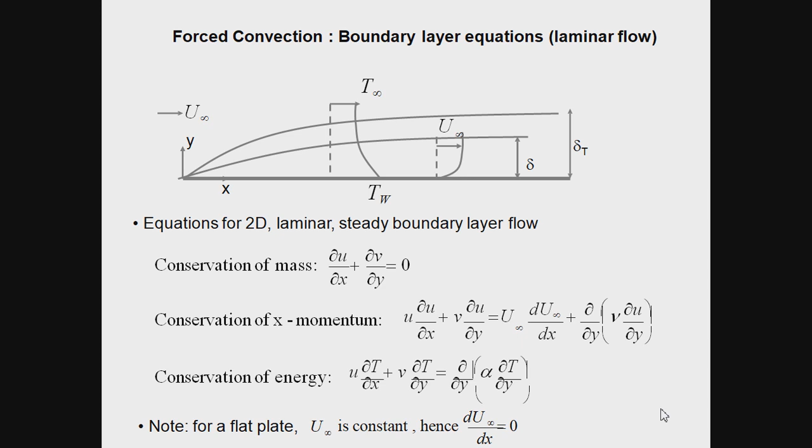First, we will consider forced convection in laminar flow, with steady flow. In the boundary layer zone, we can apply fundamental laws of physics: conservation of mass, conservation of momentum, and conservation of energy. All the equations are given in the slide, where u and v are the velocities in x and y direction respectively, and alpha is the thermal diffusivity. As we know, for a flat plate the free stream velocity of the fluid is constant, so its first derivative with respect to x, the direction of flow, will be 0.

Now in forced convection over a flat plate, as discussed in the last slide, we want to evaluate the values of coefficient of friction and convective heat transfer coefficient by solving the equations of conservation of mass, momentum, and energy. These equations can be solved approximately or numerically, and an exact solution can also be obtained.

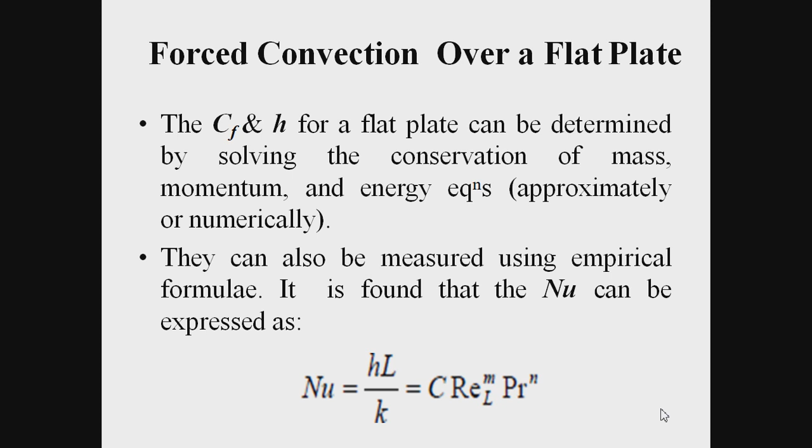By solving these equations, we can get an empirical formula. This formula can be expressed as the Nusselt number, that is HL upon K, as a function of Reynolds number and Prandtl number, where C, M, and N are coefficients depending upon the geometry of the boundary.

Now in this slide I am showing the exact solution of that equation given by Blasius. As per that solution, boundary layer thickness delta upon x equals 4.99 upon root of Reynolds number, the local Reynolds number, where x is the distance of the place we want to evaluate the boundary layer thickness, and delta is the boundary layer thickness.

Similarly, the skin friction coefficient can be obtained by this formula, defined as the ratio of wall shear stress and half rho u infinity squared. It may be given as 0.664 divided by root of local Reynolds number.

Likewise, we can get the average drag coefficient, defined as the average of this skin friction coefficient over the length of the plate. Similarly, the local Nusselt number is based on the position at which we want the value, and if we average these values, we get the average Nusselt number. All these values are for forced convection over a flat plate in laminar flow.

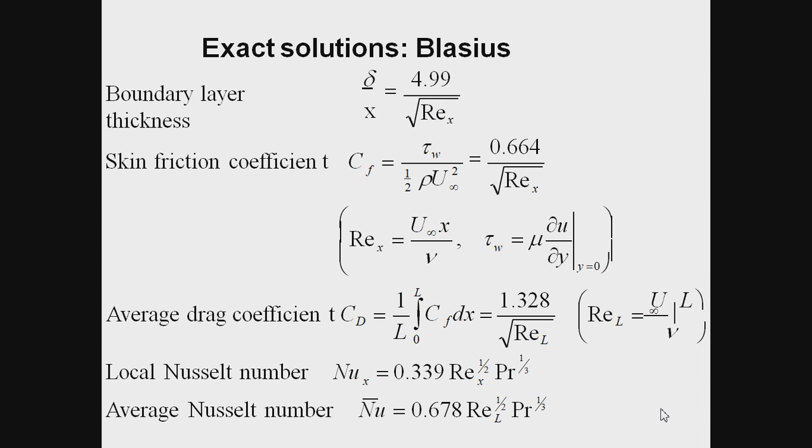Similarly, in this case we can evaluate the local heat transfer coefficient using this formula and the average heat transfer coefficient using another formula. All these formulas don't need to be memorized; we can use them directly from the heat transfer data book.

The properties required for calculating all these values include thermal conductivity. For Prandtl number you require dynamic viscosity and specific heat of the fluid. All these properties can be obtained from the heat transfer data book. This is very, very important.

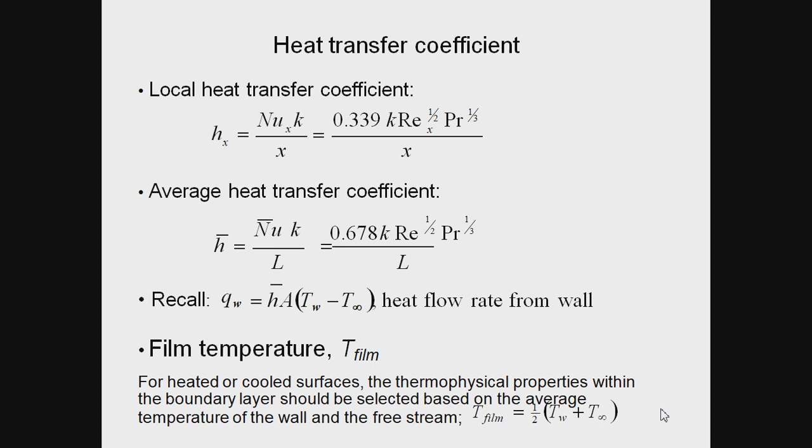The values of the properties will be evaluated at film temperature. Film temperature is the average of surface temperature and the temperature of the free stream fluid. This is very important, that all properties are evaluated at film temperature, and we can get these values using the heat transfer data book. There is no need to memorize these formulas.

Now, based on the previous solutions, we can have curves. As we can see, the hydrodynamic boundary layer keeps increasing as we move in the downstream direction. Similarly, the thermal boundary layer also increases, but the convection coefficient H keeps decreasing in the downstream direction. Initially, this decrement is very fast.

Similarly, a similar analysis can be done for the turbulent boundary layer, as shown in the figure. The laminar region is in the upstream direction, and thereafter, in the downstream direction, we get the turbulent boundary region.

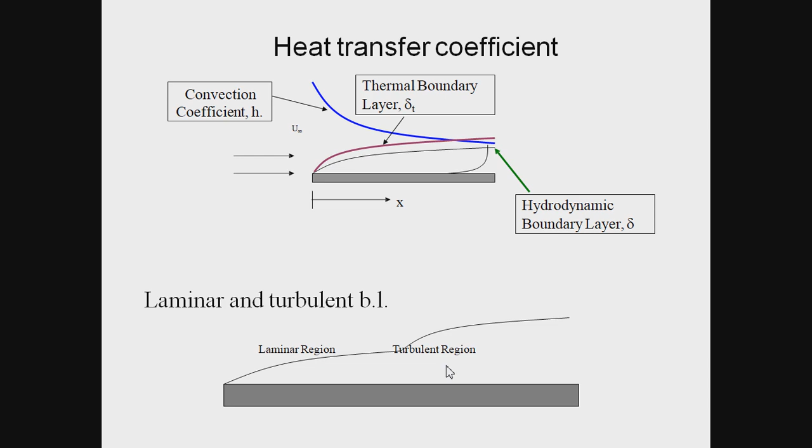Now we will discuss forced convection over a flat plate when turbulent flow is present. In that case, Reynolds number can be obtained using this formula. Then, using these formulas for coefficient of friction, coefficient of drag, local Nusselt number, and average Nusselt number, we have to apply these formulas. All the formulas are given in the heat transfer data book.

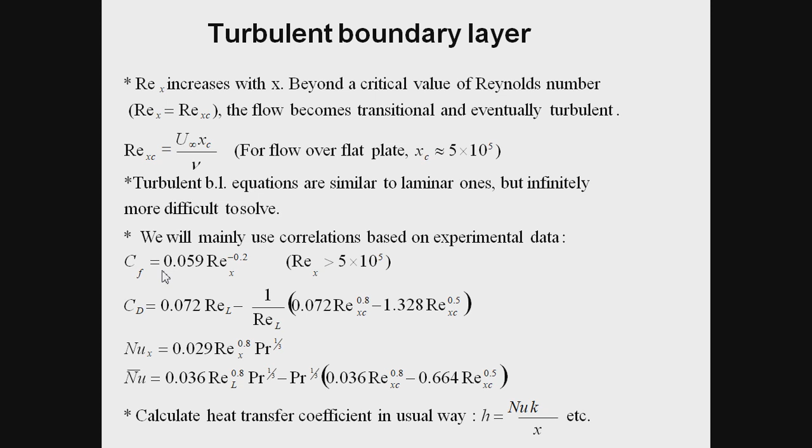After getting the value of Nusselt number, we can easily get the value of the convective heat transfer coefficient, which is the ultimate objective, so that we can find the heat transfer rate using Newton's law of cooling: H times A times (Ts minus T infinity).

Now see the laminar boundary layer development. It can clearly be seen that the boundary layer grows as we move in the downstream direction, and the profile is delta proportional to root x. This means the initial growth is fast, and thereafter that growth rate becomes smaller.

That growth rate is 1 by root x. Similarly, if we see the wall shear stress in case of laminar boundary layer, it can clearly be seen that as we move in the downstream direction, the wall shear stress keeps on decreasing. This decrement is very fast in the initial length of the plate, and thereafter it becomes almost constant and becomes less steep.

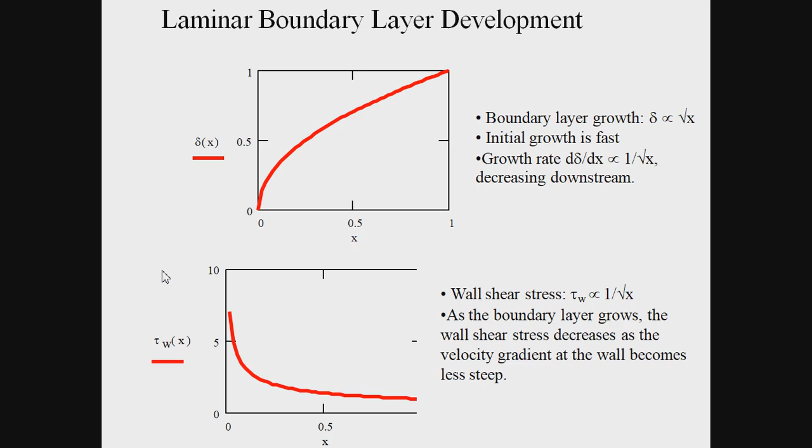We can also consider the forced convection when there is a combination of laminar and turbulent flow. This can happen when the plate is sufficiently long so that the flow becomes turbulent, and we should use the average values of coefficient of friction and Nusselt number. For calculating the coefficient of friction, what we have done is average the values.

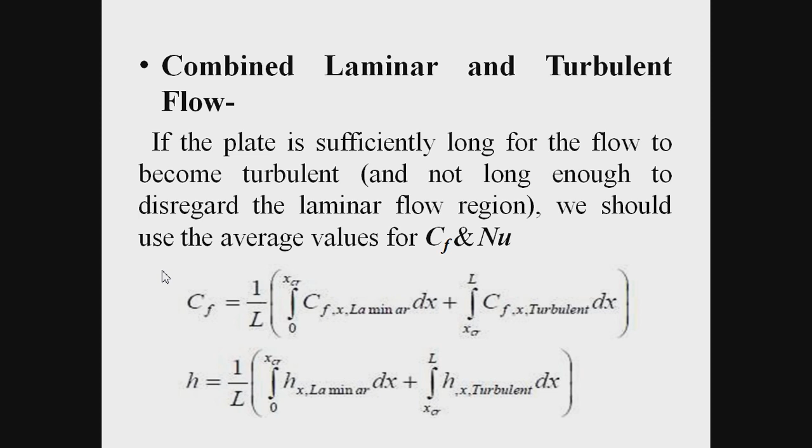As shown in the last slides, if we perform the integrals and simplify them, we will obtain these expressions for the Nusselt number and the coefficient of friction. By using these formulas, we can easily calculate the convective heat transfer coefficient and coefficient of friction. All these formulas are given in the design data book.

Now, these above relationships have been obtained for the case of isothermal surfaces, but could also be used approximately for the case of non-isothermal surfaces. In such cases, assume the surface temperature to be constant at some average value.

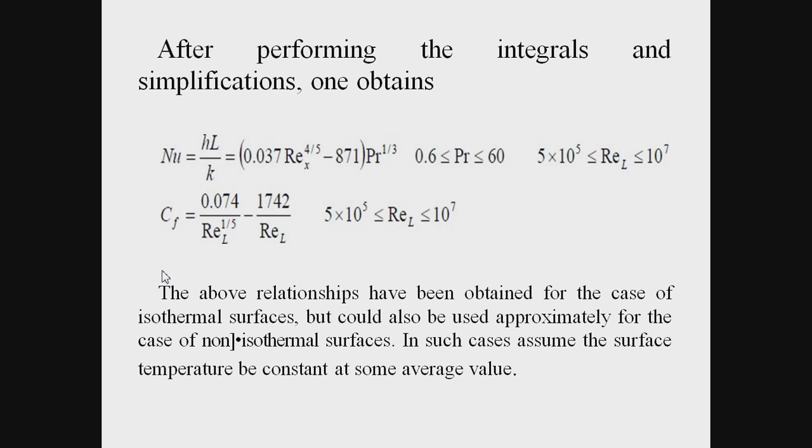For the isoflux case, the local Nusselt number for laminar and turbulent flow can be found from these expressions. It is very important to note that the isoflux relationship gives values that are 36% higher for laminar flow and 4% higher for turbulent flow, relative to the isothermal plate cases.

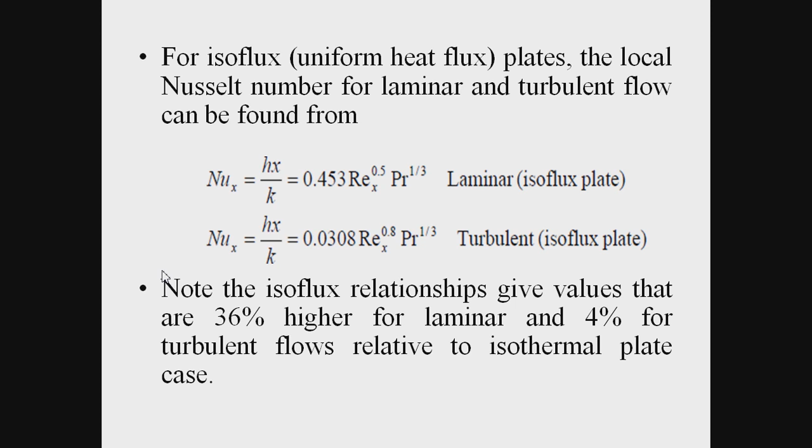So this is all about forced convection. Now we will try to understand free or natural convection. First of all, we should know what free or natural convection is.

Natural convection is a mechanism or type of heat transport in which fluid motion is generated only by density differences in the fluid occurring due to temperature gradients. This is very important: the density difference is there just because of the temperature gradient.

As we know, the plate on which the flow occurs has a temperature somewhat different than the temperature of the fluid. Because of that, a density difference is there and flow takes place. There is no external source like a pump, fan, or suction device involved.

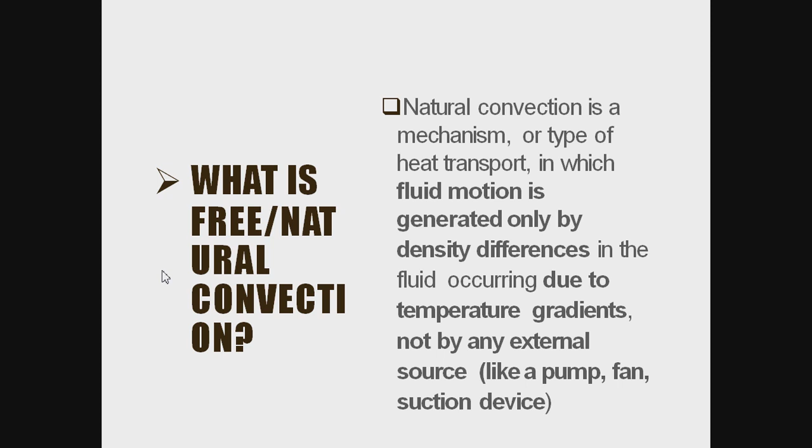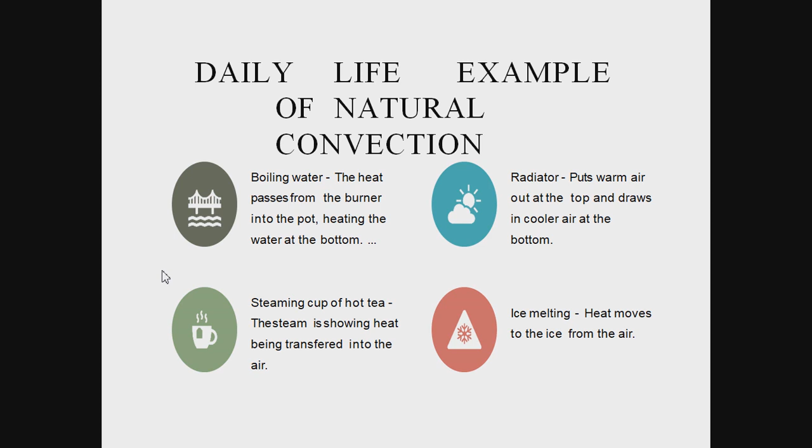These are some real life examples of natural convection. Boiling water: heat passes from the burner into the pot, heating the water at the bottom. A radiator puts warm air out at the top and draws in cool air at the bottom. Similarly, a steaming cup of hot tea shows heat being transferred into the air, and ice melting shows heat moving from the air to the ice.

One more example by which we can easily understand natural convection is a hot egg exposed to cooler air. In the figure, it's very clear that the cold air tries to replenish the warm air, and because of that, flow occurs in the upward direction, because warm air has less density than cold air, and because of that, flow takes place.

The heat transfer that is enhanced as a result of this natural convection current is called natural convection heat transfer.

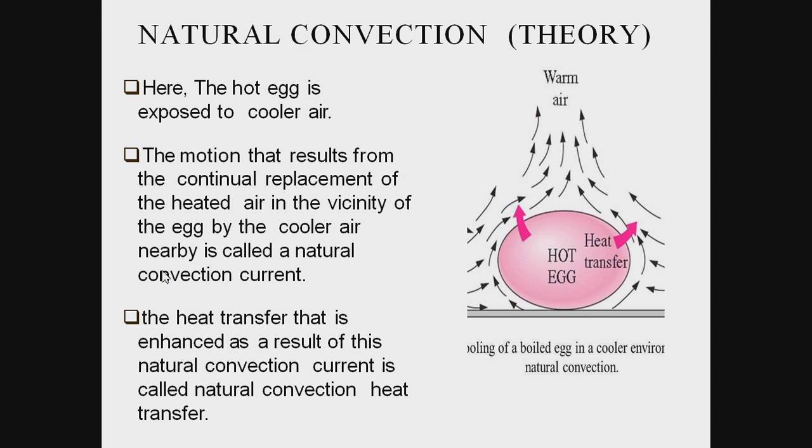Now, free convection. Again, we will try to understand that a free convection flow field is a self-sustained flow driven by the presence of a temperature gradient, as opposed to forced convection, where external means are used to provide the flow. This is very important to learn: in case of free convection, density difference is responsible for the flow, and this density difference we get from temperature difference.

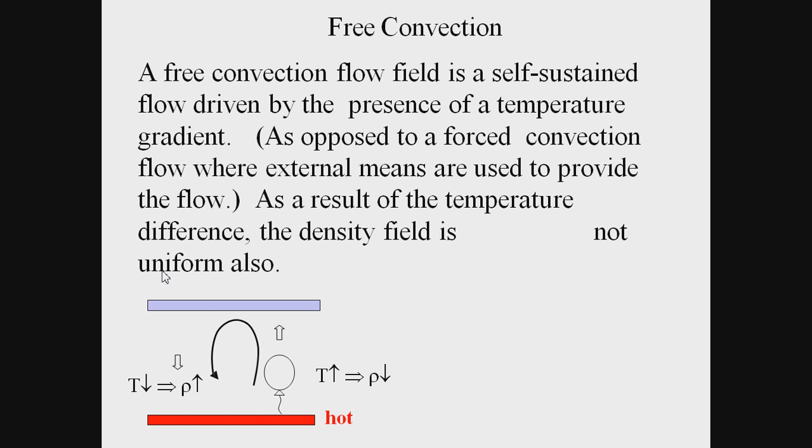Now, basic definitions. Consider a hot plate, which is vertical, with surrounding fluid that is cold. The plate is warm, so an upward force acts that is equal to rho infinity minus rho, into g, into volume. This is called the buoyancy force, and this effect is called the buoyancy effect.

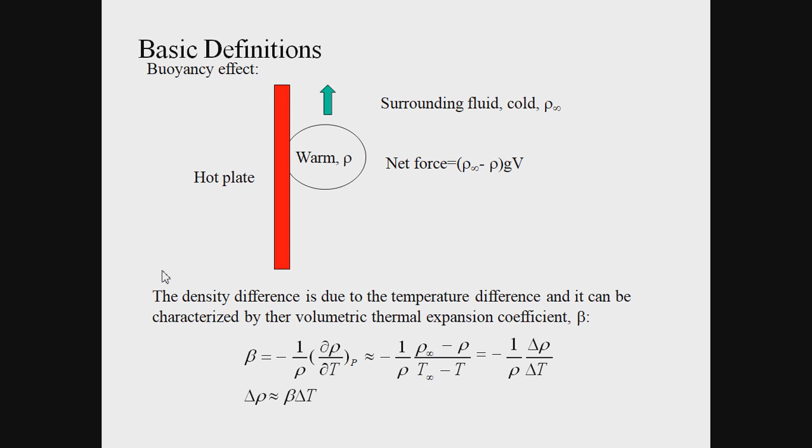In this case, this density difference is very important. The density difference is due to the temperature difference, and it can be characterized by the volumetric thermal expansion coefficient beta, which is defined as the rate of density change with temperature multiplied by 1 by rho, with a negative sign. So delta rho will be almost equal to the product of the volumetric thermal expansion coefficient and the temperature difference.

Now we will define a very important non-dimensional parameter called the Grashof number. It is the ratio between the buoyancy force and the viscous force. As we already discussed, in case of natural convection, the dominant force is the buoyant force, not the viscous force.

So Grashof number is defined as the ratio of the buoyancy force and viscous force, and we get this formula. We can easily see that gravity plays an important role. The volumetric thermal expansion coefficient beta is very important, and in the denominator viscosity is there.

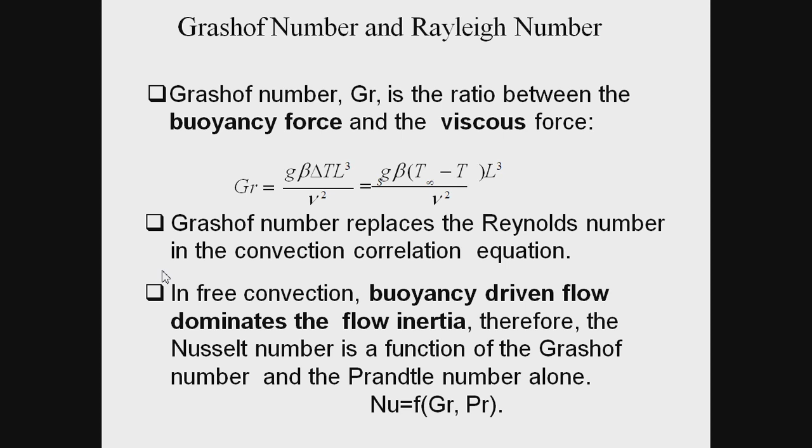It is very important to note that Grashof number replaces the Reynolds number in the convection correlation equation. In forced convection, Nusselt number was a function of Reynolds number and Prandtl number. But in natural convection, Nusselt number is a function of Grashof number and Prandtl number. In free convection, buoyancy driven flow dominates over flow inertia, so Nusselt number is a function of Grashof number and Prandtl number alone.

Now there is a concept of Rayleigh number also. In many instances, it is better to combine the Grashof number and Prandtl number to define a new parameter called Rayleigh number, which is the product of Grashof number and Prandtl number. Its main use is to characterize the laminar to turbulent transition of a free convection boundary layer flow, by giving a limiting value to identify whether the flow is laminar or turbulent.

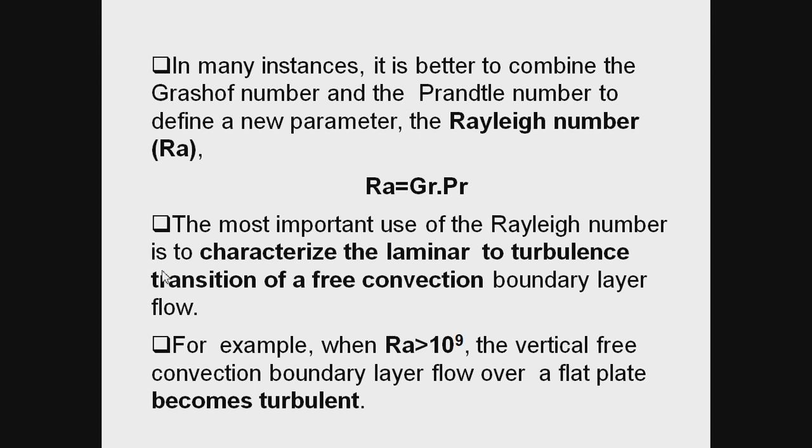For example, when the Rayleigh number is more than 10 to the power 9, the vertical free convection boundary layer flow over a flat plate becomes turbulent. This is for the hot vertical flat plate. If the Rayleigh number is greater than this value, the flow will be turbulent, otherwise laminar.

Now we will consider steady laminar free convection over a vertical plate. We are considering the flow in the upward direction, with X aligned along the upward direction, for this hot plate. We are assuming the flow is steady, laminar, and two-dimensional, and the fluid to be Newtonian with constant properties, meaning properties are not changing with temperature, including density. The velocity and temperature profile for this vertical hot plate is shown in the figure.

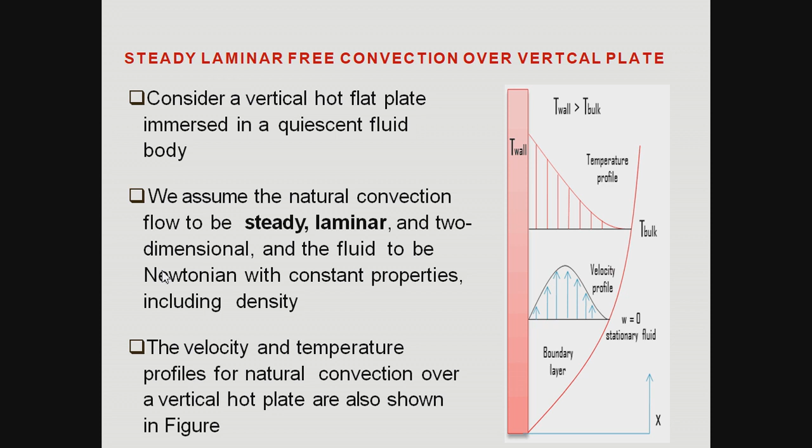Now, for solving problems related to free convection, we will use the heat transfer data book, as in the case of forced convection. In the following slides, formulas have been given for free convection for different geometrical cases. In this case also, all the properties will be calculated at film temperature, which is the average value of surface temperature and fluid temperature. Then the coefficient of thermal expansion, we know, is the reciprocal of the film temperature.

Nusselt number is HL upon K. Grashof number is given in the data book at page number 134. By putting all the values in these units, we can easily get the value of Grashof number. It is very important to know the units; we have to put the units given in the slides.

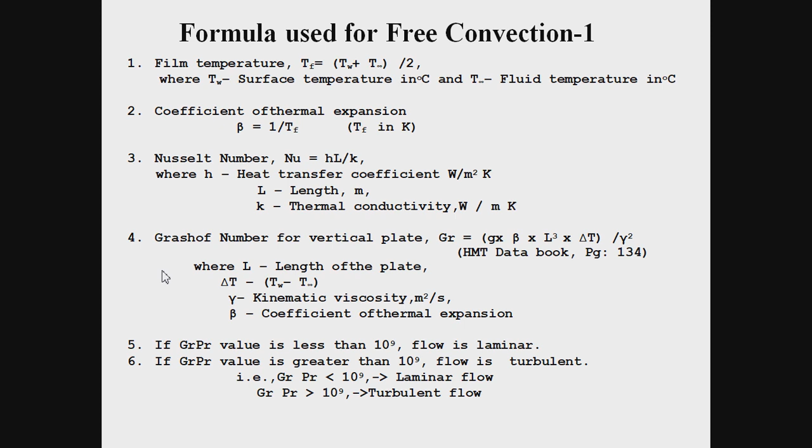If GRPR, that is the Rayleigh number, is less than 10 to the power 9, the flow is laminar. If it is greater than that, the flow is turbulent.

Now for formula usage: formula numbers 6, 7, 8 can be used for the vertical plate. If the flow is laminar, that is the Rayleigh number is less than 10 to the power 9, then the Nusselt number formula will be 0.59 times GRPR raised to power 0.25. Again, this formula is given in the HMT data book, so there is no need to cram it.

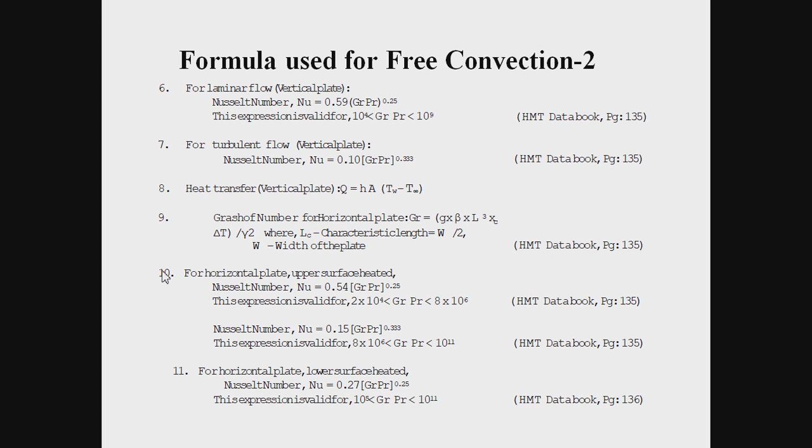Similarly, for turbulent flow, the Nusselt number has a different formula, and for calculating heat transfer we use Q equals HA times TW minus T infinity. Likewise, formulas have been given for horizontal plates: formula numbers 9, 10, 11, 12, with values given for different ranges of Rayleigh number.

These values are given in the table for a horizontal cylinder. Similarly, for a horizontal cylinder, heat transfer Q equals HA, where A equals pi D L. Similarly, the formula can be used for a sphere.